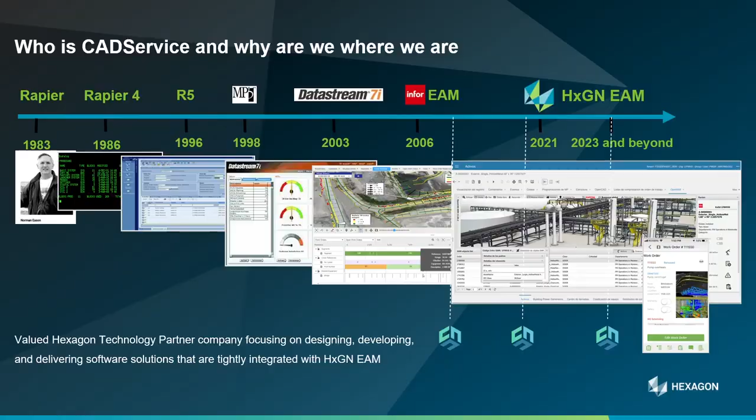So first of all, who are we? Who's CAD Service? CAD Service is a valued HxGN technology partner that focuses on designing, developing, and delivering software solutions that are part of HxGN EAM. Our journey to HxGN began more than 20 years ago with DataStream, and then Infor, and finally HxGN. So we started with 2D technologies, which later evolved into 3D technologies, and now we are very excited to work on other additional solutions that draw on different components that belong to the HxGN family.

And we are very excited. This is just our past, but we are very excited about what the future brings and the opportunities that lie ahead. And in this regard, we will be launching the OpenCAD Reality Viewer, our new module that will become GA in May 2024.

So look what happened here. Last year in Vegas, we had an amazing time there, and we were honored to receive the 2023 Outstanding Partner of the Year award by HxGN LIVE. This is an incredible milestone in our journey that's a testament to the strength of our collaboration with HxGN. And we are excited about the opportunities that this recognition opens up for us.

So why are we here? Why are we here to talk about reliability and asset visualization? Because asset visualization helps and it's critical to ensure a reliable and sustainable operation.

And first, to talk about that, we want to introduce what does reliability mean to us. This is by no means exhaustive or academic. We have experts you have heard from throughout this conference, such as George and Joel talking about reliability, but this is just our humble attempt to answer why asset visualization can help with reliability.

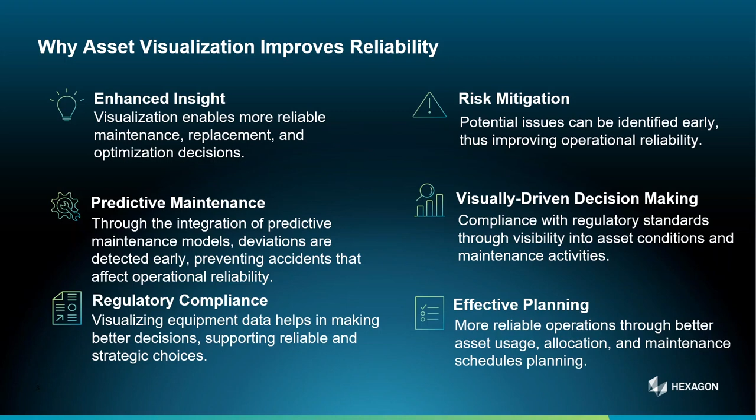Visually driven decision making. We've been hearing a lot from Joel and George talking about how data-driven decision making is the future to ensure a reliable and sustainable operation. So visually driven decision making is key, and it's empowered by visualization technologies as they provide information about asset conditions, maintenance schedules, leading to more strategic and reliable choices.

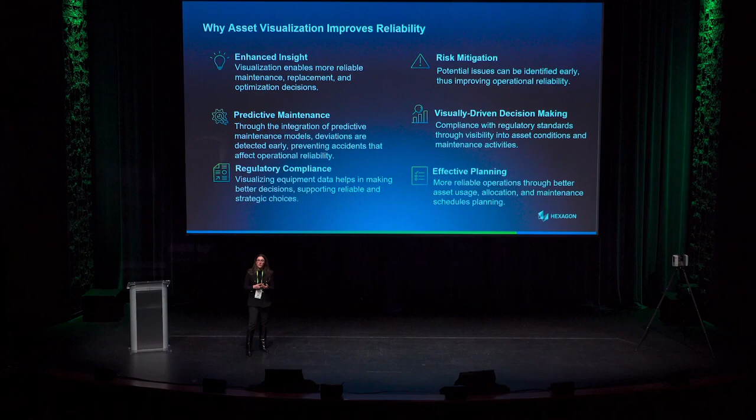Finally, effective planning. As I said before, a more reliable planning of asset usage and resource utilization can improve reliability, but also reduce downtime and improve the bottom line. So now I'll pass it on to Giuseppe to talk about OpenCAD.

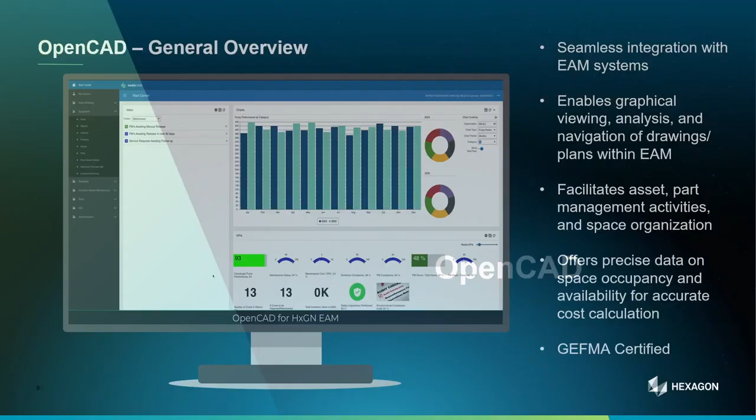All right, thanks, Chiara. Thanks, great introduction. So, considering my age, I was there back in 2003 when we initiated our journey with DataStream at the time, and then with Infor, and then finally with Hexagon. So OpenCAD was the original idea, to bring the drawings into being part of an asset management system.

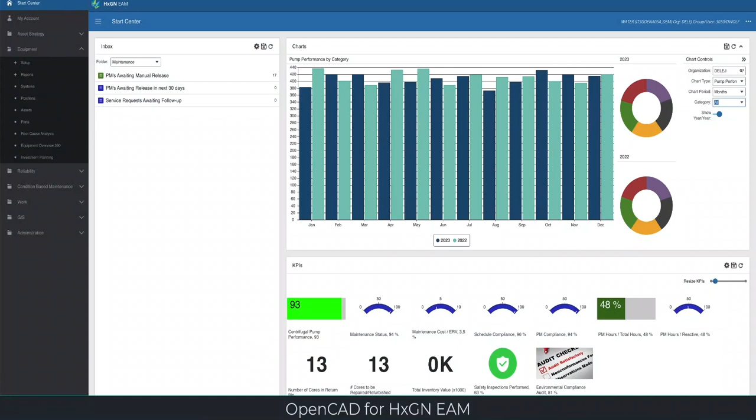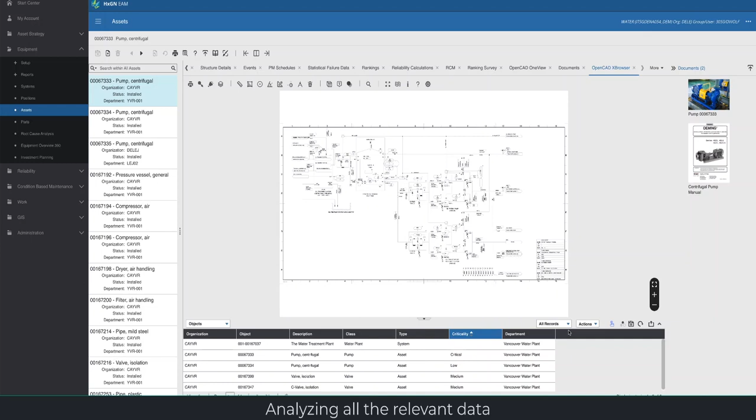So the idea is basically this: how we can see the interaction between our equipment and the visualization of it. We can easily see in this video the potential of getting an equipment visualized by using the dedicated OpenCAD tab there. So the beauty is also that in addition to that, you have all the equipment that is in place, and you can run queries against all the EAM data. For example, in this example, we are seeing the condition and the criticality of our assets on top of the P&ID drawings, which is great.

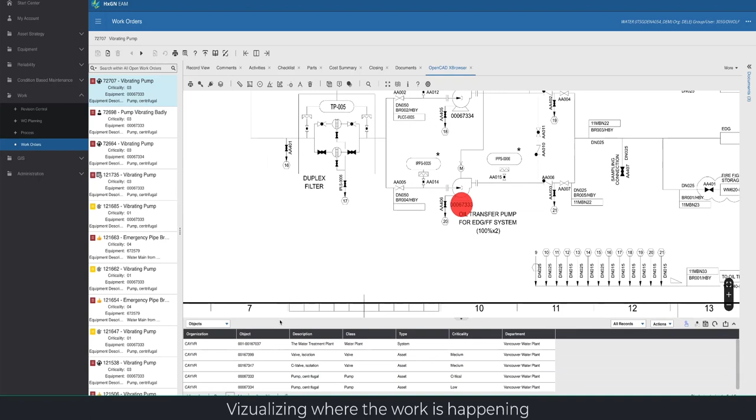But think about seeing where the work is happening. So we can also start from a work order, activate the dedicated OpenCAD tab and run queries against the work orders. For example, to see different work order types. This morning we saw different other ideas to get the data, but not from a visualization standpoint.

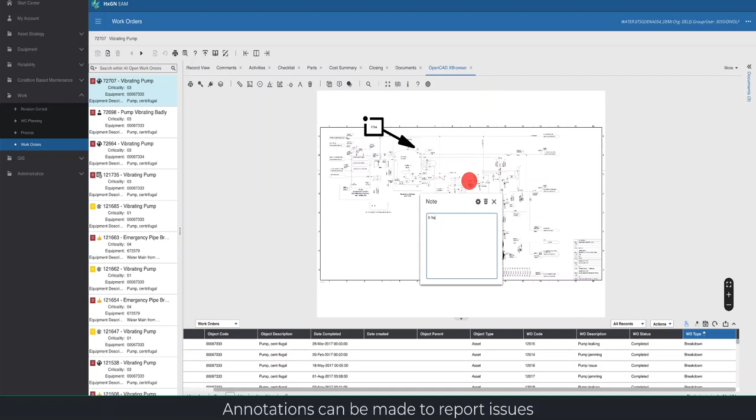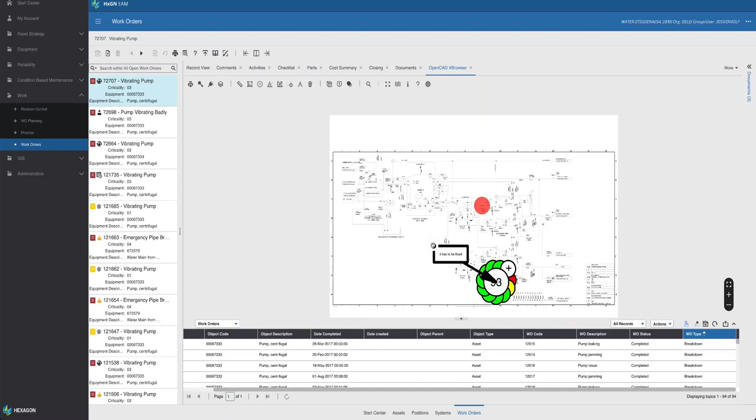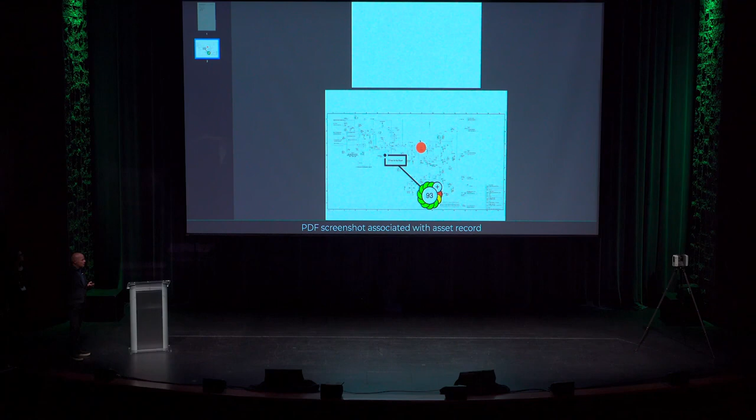And then, without making changes on the drawing, every EAM user can make comments, can create a note saying, hey, this is something that you have to take care of. And the notes become an EAM document. Very easy, nice and easy. This is a report already associated with your piece of equipment. So for us, it's mandatory to make it simple and capable of adding value.

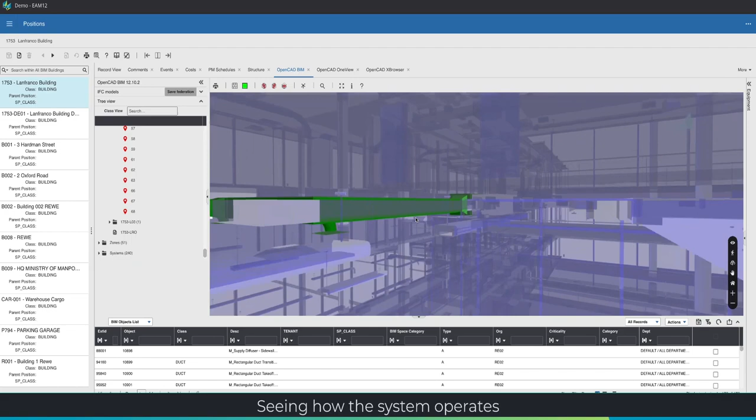A few years later, since the technology evolved, we were engaged for bringing the 3D world. Why? Because the mission was to bridge the gap between design and construction and operation and maintenance. So the beauty here is that, of course, we can see the entire facility that we can have in EAM as a building. So in this example, we are happy to see how we can also use the BIM data to see how a certain system operates. Like this. It's a dream that came true.

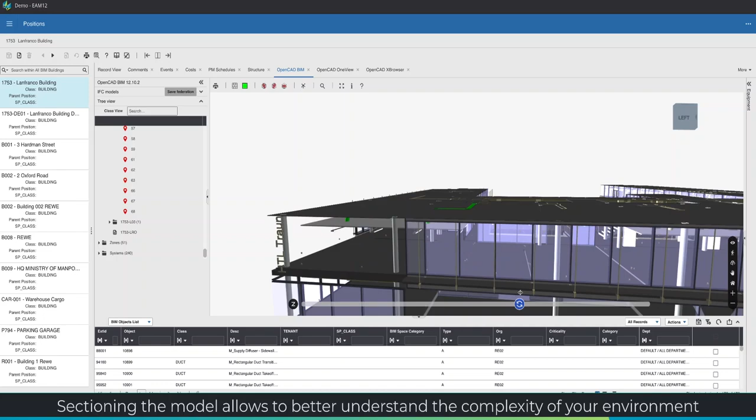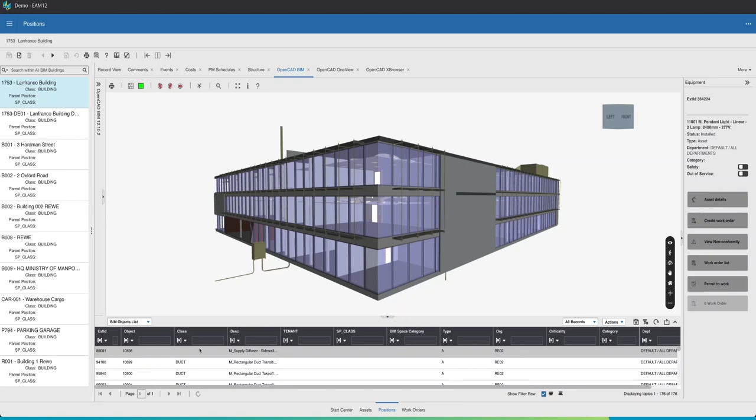It's always impossible to get the same level of understanding by visualizing linear tabular data. But also you can use the cutting edge technology for sectioning your model, and then you can see where it is perfectly located in a certain complex asset as we are used to manage. You can also use the top-down or the bottom-up technology to run the query.

And here maybe you can be interested in understanding where a certain equipment is located. So you can type lamp, and maybe you have a bunch of them, so you can switch from one to another, right? You can group assets, and you can see where they are located. Why is it so important? Because maybe it can be isolated to identify potential issues, and then you can also create work orders on top of that.

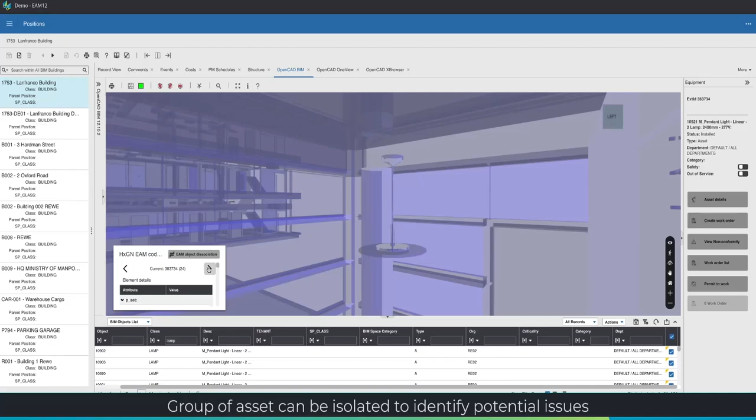Okay, so the question is: is it better to use the 2D approach or the 3D approach instead? We think that the best way is to embrace this holistic approach instead. So not really deciding what is the best, but maybe we can combine both of them. So we created this OneView screen which incorporates the 2D and 3D visualization, and they are working interactively.

It means that when you are selecting one piece of equipment in the 3D visualization, you will see the reaction of the 2D visualization. Yesterday in the workshop, we had the pleasure to show a real demo about that. It is absolutely stunning.

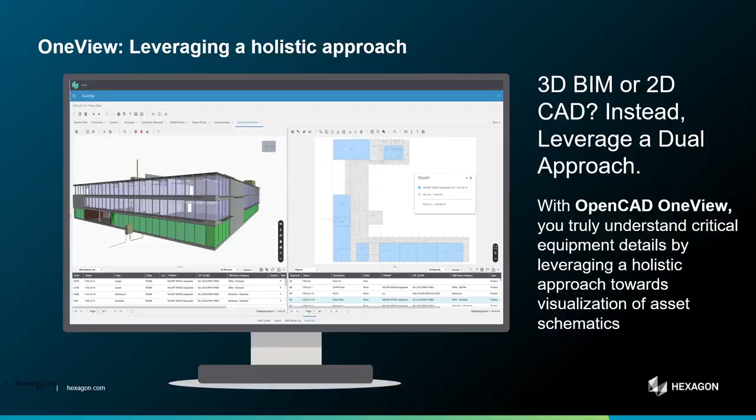But also, and this is also a very important moment for me to thank you all, the EAM support team and the EAM development team in particular, because

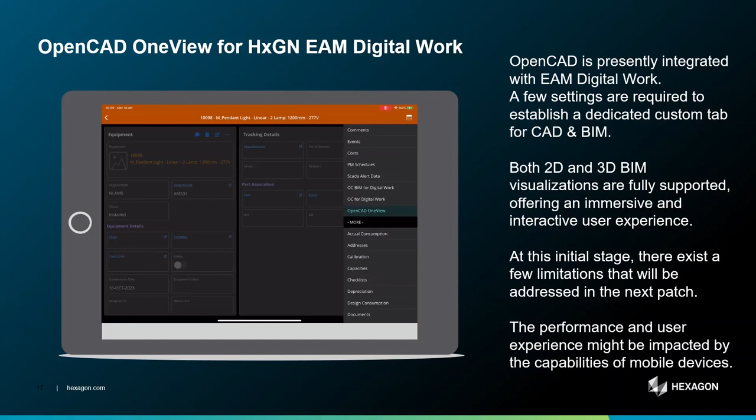from 12.1 we have both the 2D and 3D visualization within the digital work. You can see here an example by selecting the same light that we were using before. You can go to the dedicated tab, which is available on the digital work, and that's it. And then you can see both the 3D and 2D visualization in one single step.

This is supposed to be where you go, ooh, ah. Ooh, ah. Thanks, Kevin. So that's really cool. It is really cool.

And then, taking also suggestions from other presentations, you have everything at your fingertips.

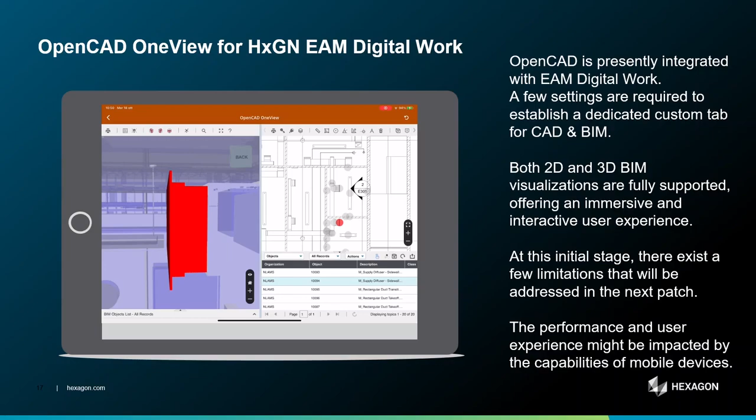Okay. Right, now, what happens now is something new. It's something that requires new ideas, new energy. And this is happening because we are now part of HxGN, and we are living in a community of smart people, and they are more than happy to collaborate with us. But also on our side, we need fresh energy and new potential.

So I'm very excited to be here today because this integration with HxGN and with Leica Geosystems enables us to create a new way to give value to your businesses. Before the HxGN products by Leica Geosystems, the real opportunity that you had to visually inspect equipment and to get information from your data and from your facility was to have a 3D model or a 2D floor plan of it. This is still great, but it was a huge gap if you didn't have something like that.

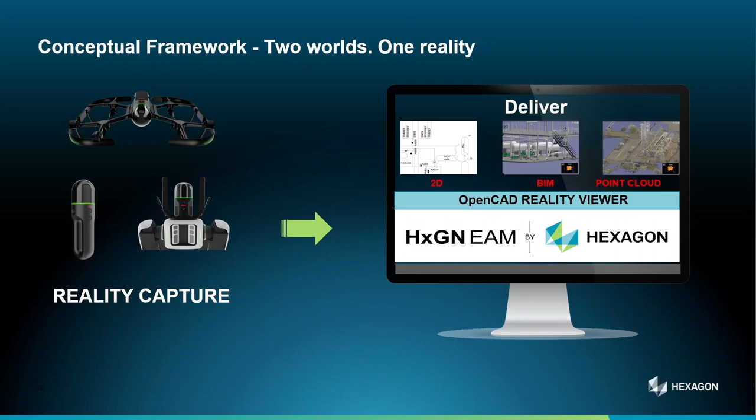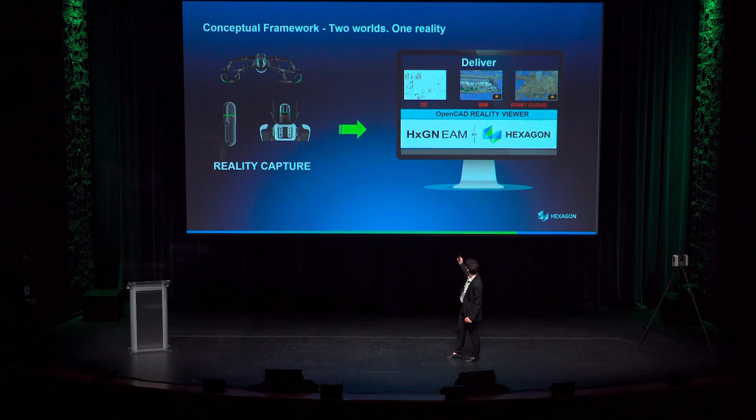So here is how it works. We start with the Leica Geosystems amazing devices, which are capable of capturing reality. You can see we can mount these kinds of scanners, as Joel announced also, both on tripods or on drones. You can take it in your hand, or you can mount it on automated dogs, and then perform these scans automatically to get your data into EAM.

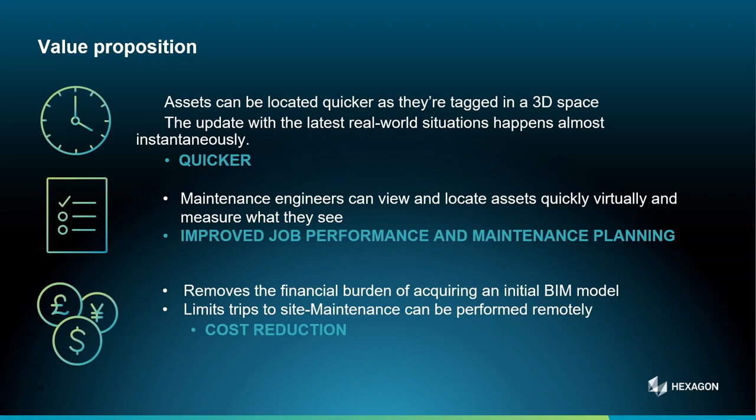So this is our value. You can save a lot of money because acquiring and scanning your facility is cheaper. Saving money means saving costs also during operations. Because once you have digitalized your facility and you have a digital twin, you can perform visual inspections. You can understand how everything works thanks to the EAM insights. And you can change the way you operate thanks to the data you have.

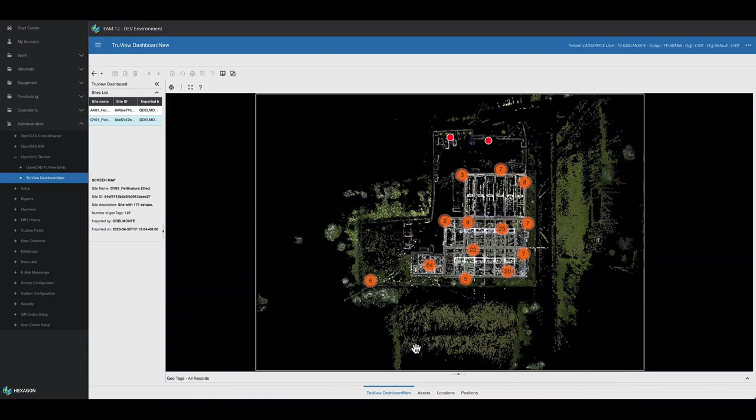So I'm really proud here to show you how this works in EAM. What you see is a plant from one of our customers and partners, which is Calzedonia. You know Calzedonia, it is a worldwide brand. This is an industrial plant. It was scanned in a matter of hours.

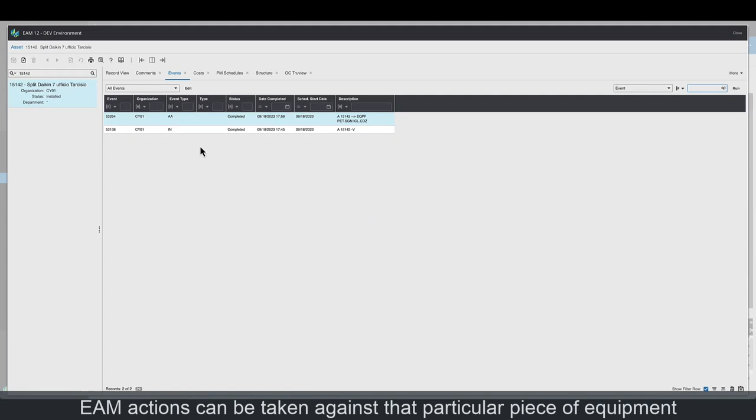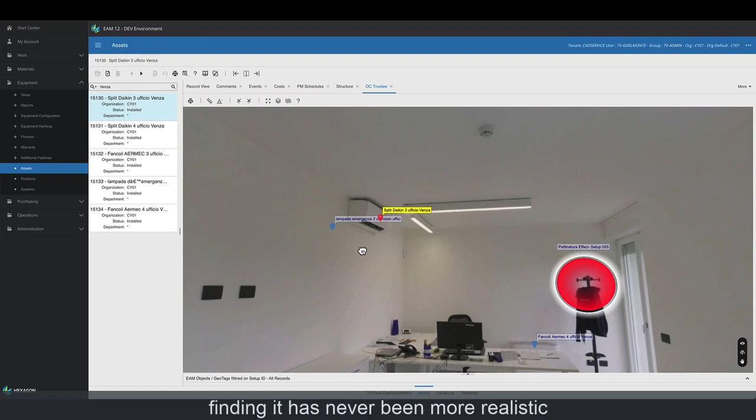Here you can see we can browse for some assets, like for example this fan coil, and in the grid of data you can browse for everything. You can create work orders in case something is wrong, or you can understand how it performs thanks to the KPIs. Furthermore, when you recognize something might not be working as expected, nothing easier. You can get more information. You can also, of course, create work orders. You can request a maintenance guy to take action and perform an inspection.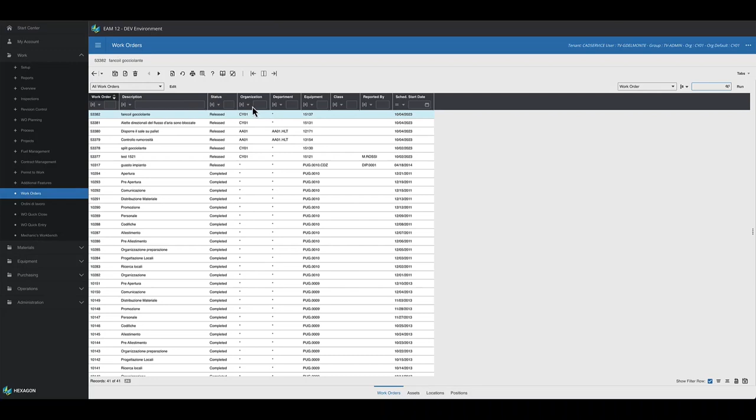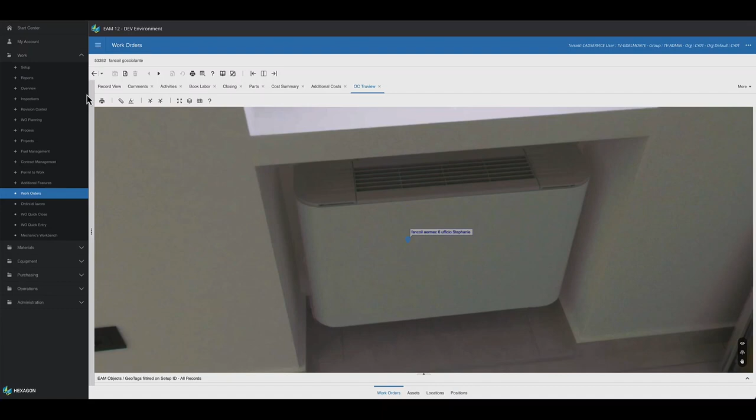And then everything is inside, of course, EAM, which means you have no data loss, all data is synced automatically, and you can benefit from all the HxGN EAM functionalities. There is much more. Let's say we want to send a quick report to some guys out there in the field. With one touch, you can draw on the image, you can take additional notes and perform a report. And then send this completed report to the guys that need to be in the field.

So there is much, much more to say. This was just a quick demo of what we were able to do with these devices, especially because thanks to this technology, we can capture reality as is now, which is amazing because since it is so fast, you can perform the same scan of your facility at some intervals to understand what has changed from time to time.

Another use case that we have been exploring is to compare the true view information from the HxGN point cloud scans and the 3D or the 2D. So being able to compare the as-is versus the expected and being able then to spot non-conformities. This was just a very short picture of what we are currently doing.

Thank you. Chiara, can you talk to us about the future of OpenCAD? My pleasure. Thank you, Andrea. Great presentation.

So yeah, now we would like to talk about the future of OpenCAD, what lies ahead for us. These are just some of the future steps that we are taking to expand the use of visualization technologies. First of all, our HxGN EAM Reality Viewer module will embrace Reality Cloud Studio technology powered by HxDR. Secondly, we are collaborating closely with LocLab and Immersal to deliver new innovative solutions.